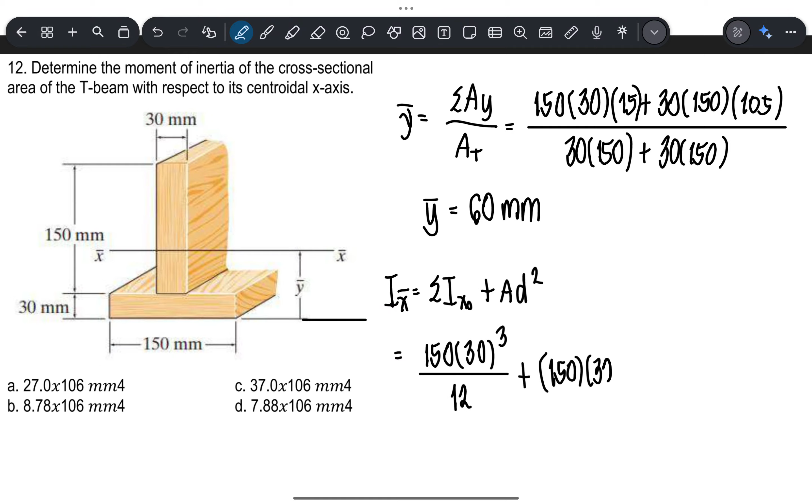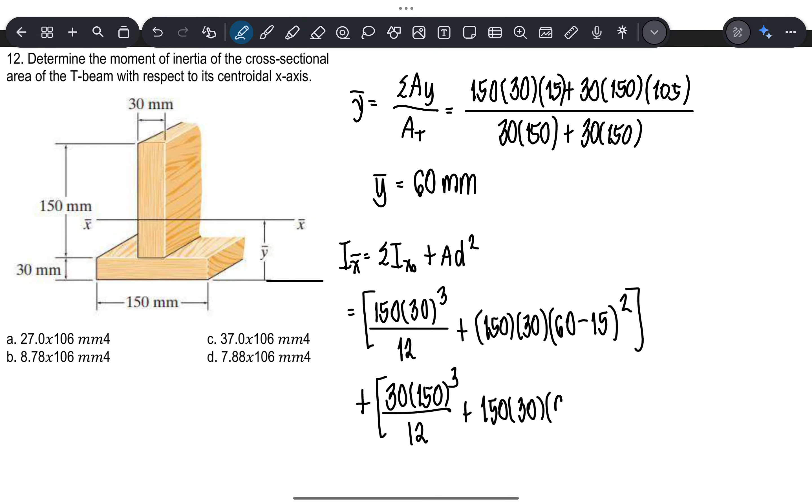And then, yung distance niya from the centroid is 60 minus 15. Squared plus ito naman, this is B, that is 30 by 150 cube over 12 plus AD squared 150 by 30. Ang centroid niya ay 60 minus 105 squared. So magkano si IX bar? 27? Sakto.

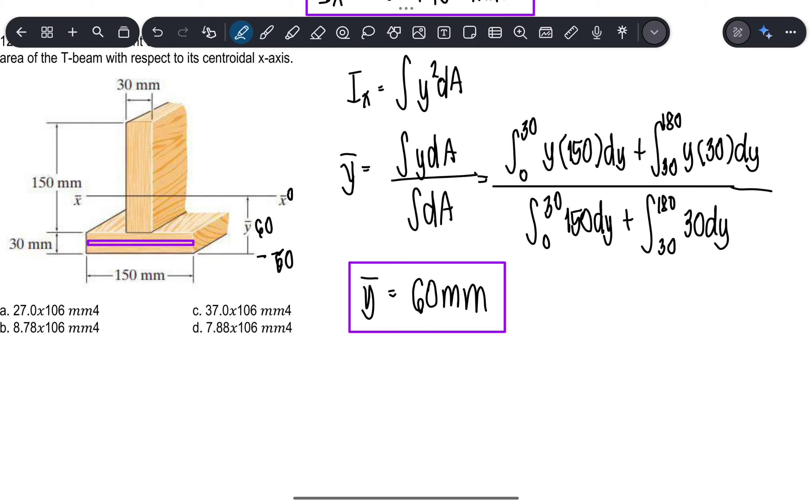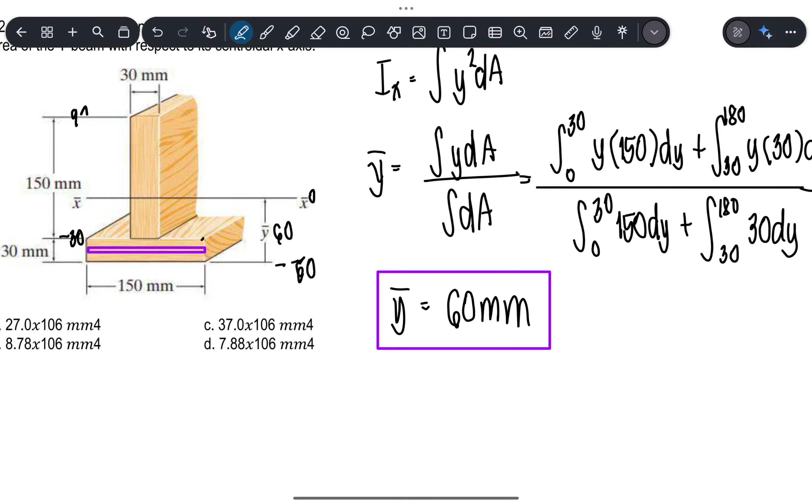So dito, this is 60. So this is negative 60. So kung ito yung magiging 0 natin, so negative 60. Tapos ito, this is negative 30. Tapos ito ay 150. This is 60 plus 150. This is positive 90. Then to solve for ix, that is the integral of y squared dA. So unahin natin to.

So the ix, ang limits natin dyan is from negative 60 to negative 30. So y squared times differential area 150 dy plus the integral of negative 30 to 90 y squared by 150, joke lang. That is 30 dy. So magkano yung ix?